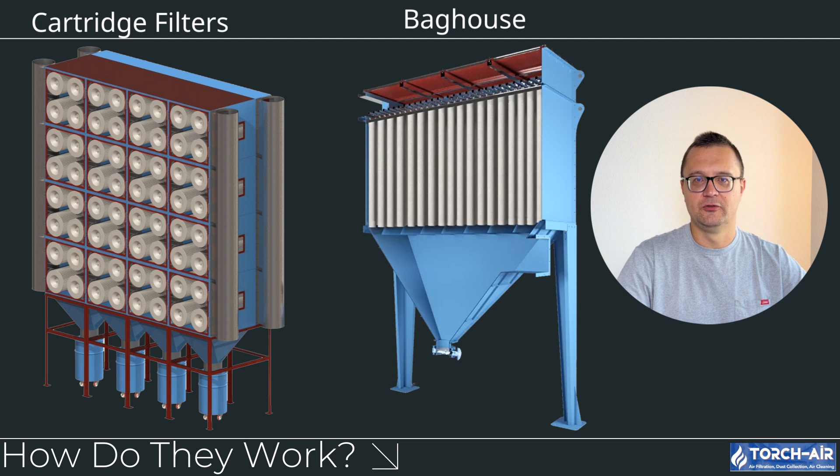Cartridge filters, on the other hand, are a bit more compact. Instead of fabric bags, they use pleated filter media in a cylindrical shape, giving them more surface area for the same amount of space. This pleated design allows them to capture more particulates while maintaining a smaller footprint. Just like baghouses, cartridge filters need regular cleaning, usually with compressed air that dislodges dust from the pleats.

Efficiency. Now let's talk about what you're really interested in: how well these filters perform in capturing dust and other airborne particulates. Baghouse filter efficiency: Baghouse filters are known for their high efficiency, especially when it comes to capturing larger particles. They're great for environments where heavy dust loads are present, such as cement plants, steel mills, and foundries. However, because they rely on fabric filtration, they might struggle with extremely fine particulates unless specialized filter media is used.

Cartridge filter efficiency: Cartridge filters, thanks to their pleated design, excel at capturing fine particles. Their large surface area allows them to be highly efficient, especially when dealing with small particulates. This makes them an excellent choice for industries like pharmaceuticals, electronics, or any operation where fine dust is a concern. However, they might clog faster if they're exposed to large amounts of dust over long periods.

Space requirements. Not everyone has a warehouse of free space lying around, so let's talk about how much room each of these systems takes up. Baghouse space requirements: Baghouses can be pretty big. Depending on how many bags you need and the volume of air you're filtering, baghouses can take up significant space. If you've got a lot of floor space and high ceilings, this might not be a big deal, but if you're working in a more compact environment, finding room for a baghouse could be challenging.

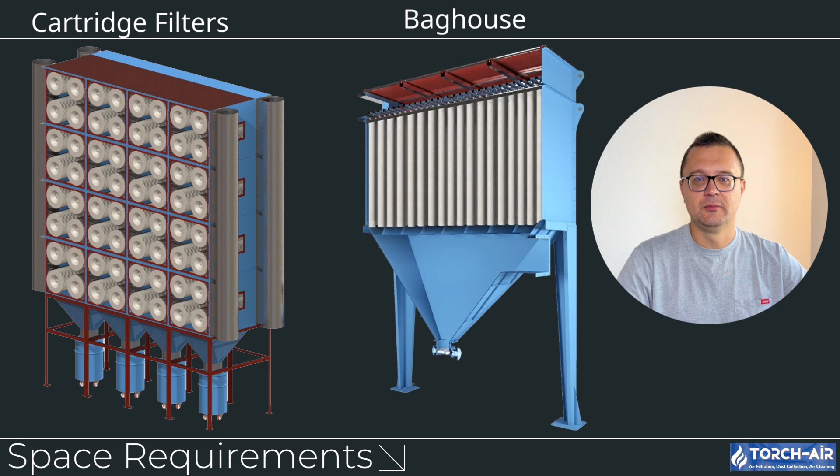Maintenance and cleaning. Nobody likes dealing with maintenance, but it's something you can't avoid. So how do these filters stack up when it comes to keeping them in good working order?

Baghouse maintenance: Baghouse filters require regular cleaning, and depending on the system, this can be done with pulse jets, shaking, or reverse air mechanisms. Over time, the filter bags themselves will wear out and need to be replaced, which can be a bit labor-intensive. But if you're dealing with heavy dust loads, baghouses are designed to handle frequent cleaning cycles without too much hassle.

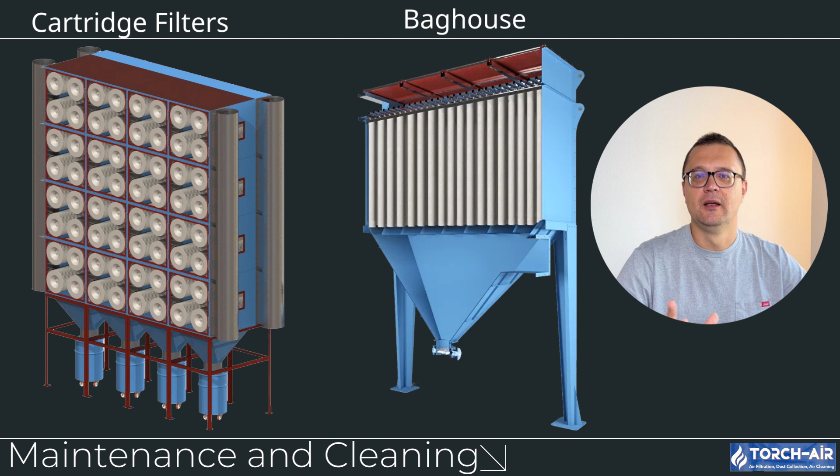Cartridge filter maintenance. Cartridge filters are generally easier to clean since they're smaller and have pleated surfaces, which can be cleaned more efficiently with compressed air. However, because of their design, they might clog more quickly if exposed to heavy dust loads, meaning you'll need to stay on top of cleaning cycles. And like baghouses, eventually the cartridges will need to be replaced, though the process is typically faster and less labor-intensive.

Cost. Let's be real, cost is always going to be a factor when deciding between filtration systems. So let's break it down.

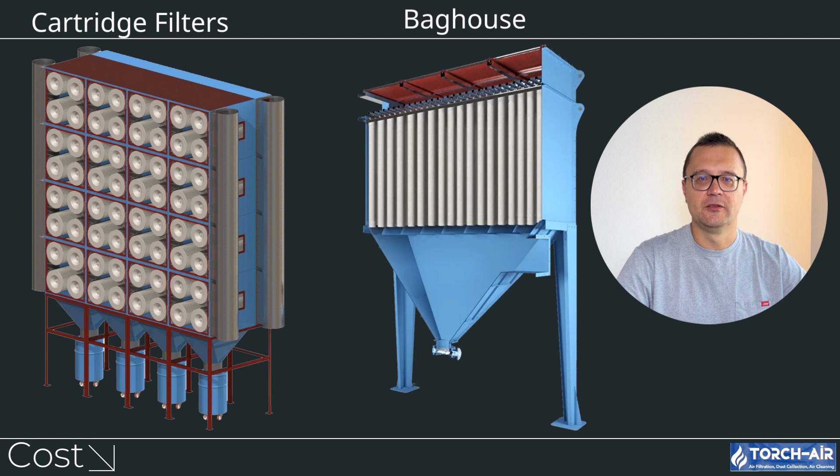Baghouse cost. Baghouses are generally more expensive up front, especially larger systems designed to handle heavy dust loads. They also require more energy to operate, particularly when pushing air through heavily clogged bags. Add to that the cost of regular maintenance and replacement bags, and baghouses can be a bit pricier to maintain in the long run.

Cartridge filter cost. Cartridge filters, while they may have a lower upfront cost, are often more cost-effective in the long term, especially if your operation deals with fine dust or operates in a more compact space. The reduced need for space, less energy consumption, and easier maintenance can make cartridge filters a more affordable option for many industries. However, if your system handles large dust volumes, the need for frequent cleaning and cartridge replacement can balance out these savings.

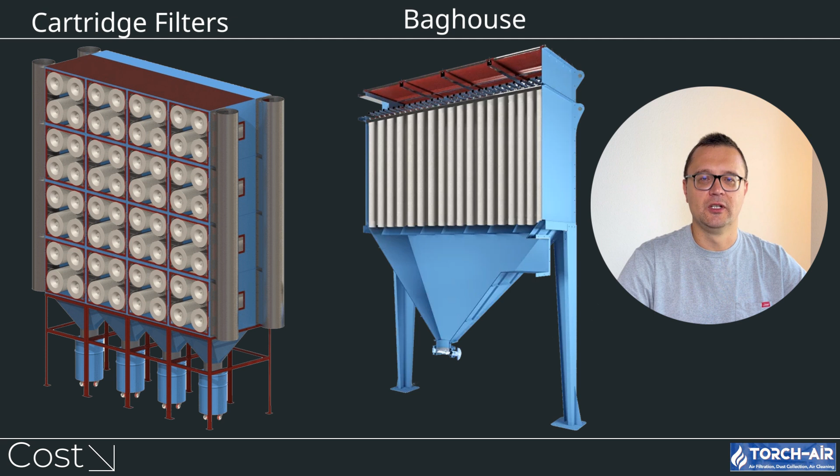Applications. Now that you have a sense of how these systems work and what they cost, let's talk about where each type of filter really shines.

Baghouse applications. Baghouses are the go-to solution for industries that deal with large dust volumes and larger particulates. You'll see them used in steel mills, power plants, cement factories, and other environments where heavy-duty filtration is required. If your operation deals with high temperatures or abrasive dust, baghouses are tough enough to take the heat, literally.

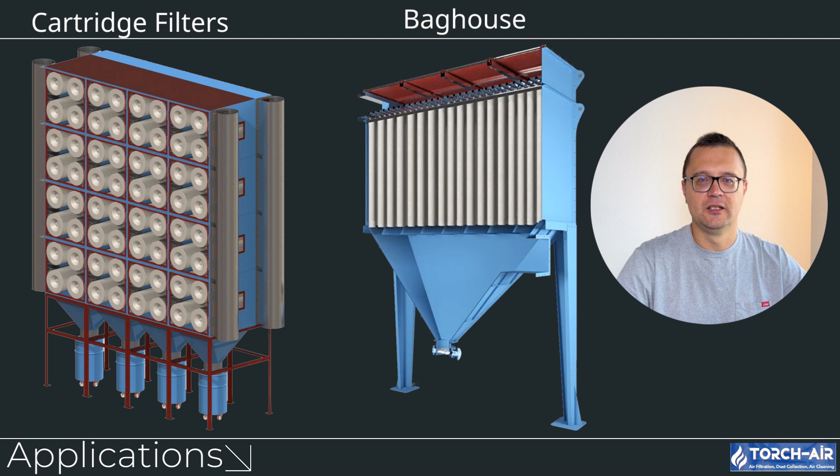Cartridge filter applications. Cartridge filters, by contrast, are great for industries that need to capture fine particulates, like pharmaceuticals, woodworking, or electronics manufacturing. Their compact size also makes them ideal for smaller operations or facilities where space is at a premium. They're best when you need high filtration efficiency without handling massive amounts of dust.

Environmental impact. Let's take a quick look at how these filters measure up when it comes to being eco-friendly. Baghouse environmental impact: baghouses can generate more solid waste, especially when you need to replace the filter bags. Additionally, their higher energy consumption adds to their environmental footprint. However, they can handle a wide variety of particulates, including hazardous materials, which can be critical in industries that need to comply with strict environmental regulations.

Cartridge filter environmental impact: cartridge filters are generally more eco-friendly thanks to their lower energy consumption and smaller waste output. Since they capture fine particulates more efficiently, they can help reduce emissions more effectively in certain industries. However, they can clog more quickly if exposed to high dust loads, which means more frequent replacement.

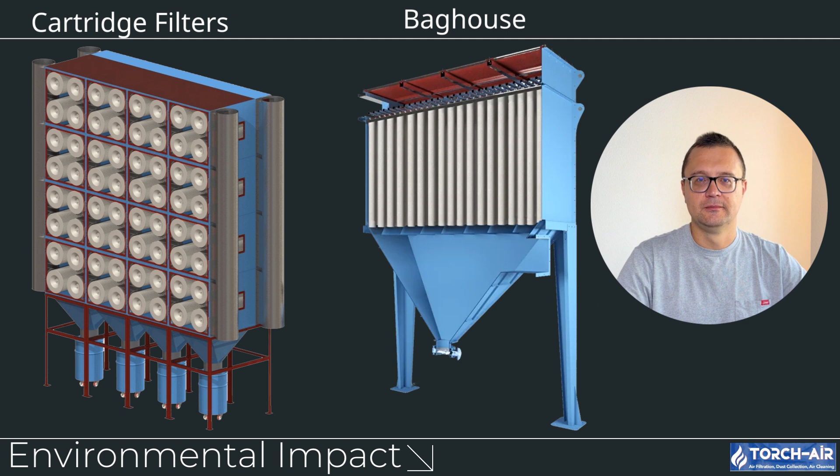So, baghouse versus cartridge filters, who comes out on top? Well, it depends on your specific needs. If you're dealing with heavy dust loads and large particulates, baghouse filters might be the workhorse you're looking for. But if space is tight, you're dealing with fine particulates, and you need something more compact, cartridge filters could be your best bet. Either way, both systems do an excellent job of keeping the air clean.